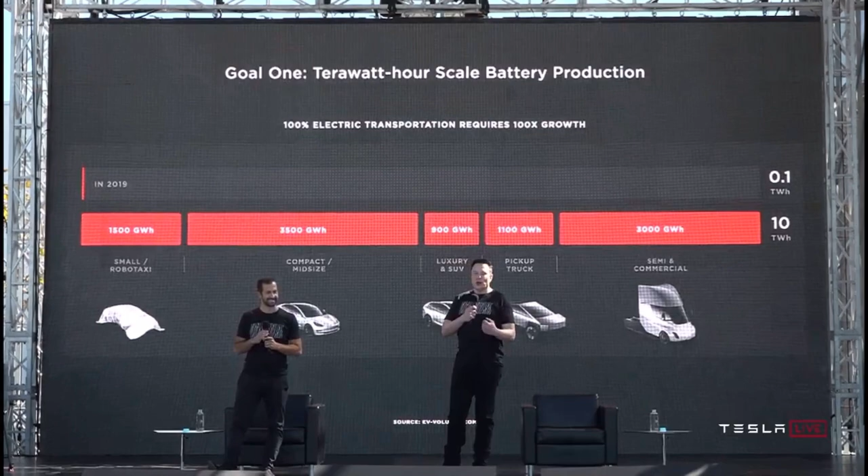So goal number one is terawatt-hour scale battery production. Tera is the new giga, and a terawatt is 1,000 times more than a gigawatt. We used to talk in terms of gigawatts; in the future, we'll be talking in terms of terawatt hours.

This is what's needed in order to transition the world to sustainability. We're talking about 100x growth in batteries for electric vehicles to achieve this mission. And we are going to get there. It's just a matter of how fast, and our intention is to accelerate it.

You basically need on the order of roughly 10 terawatt hours a year of battery production to transition the global fleet of vehicles to electric. And the average vehicle lasts 15 years, so we're talking about 150 terawatt hours, give or take, to transition all vehicles of all types to electric. So it's a lot of batteries, basically.

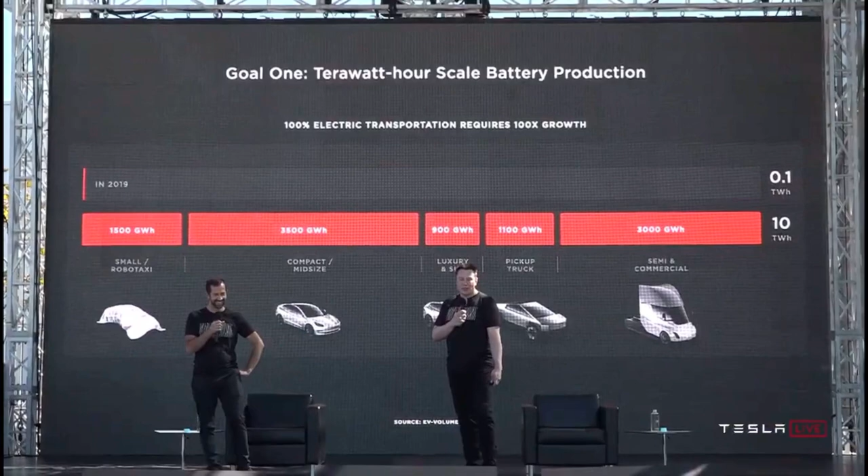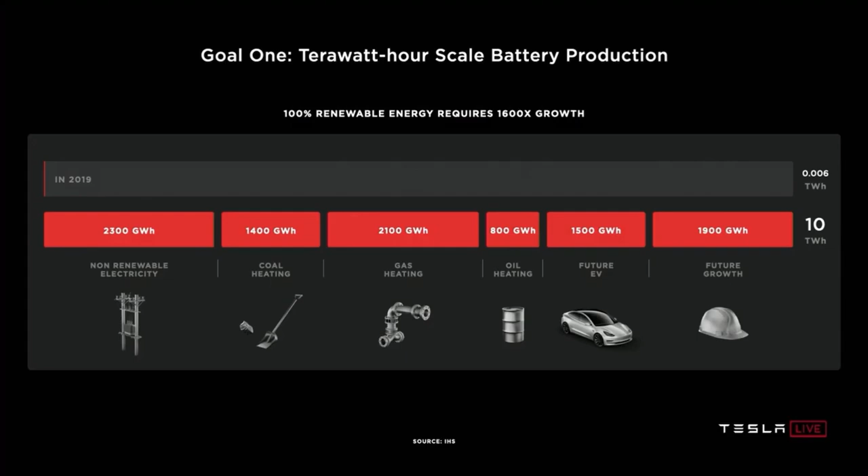And then on the grid side, we have a similar mountain to climb: 1,600 times growth from today's grid batteries to go 100% renewable on the grid and to take all of the existing heating fossil fuel uses in homes and businesses 100% electric.

This number, I think, might grow even more, as the world economy matures and as countries with high populations industrialize, we could see this number be even more. But let's say it's roughly 20 to 25 terawatt hours per year, sustained for 15 to 25 years, to transition the world to renewable. This is a lot.

So today's batteries cannot scale fast enough. They're just too small. For Giga Nevada, 150 gigawatt hours per year is probably what we expect to make out of there, but this is really pretty small in the grand scheme of things. That's only 0.15 terawatt hours.

And they cost too much. So we would need 135 fully built out Nevada gigafactories to achieve 20 terawatt hours a year. It's not scalable enough of a solution.

We need a dramatic rethink of the cell manufacturing system to scale as fast as we can and should.

And I think we should view this as more than just a question of money. Money is sort of like an ethereal thing, but it's really the amount of effort. You have a certain amount of effort, in terms of people and machines, and depending on how efficient that effort is, for a given amount of effort, you want the most amount of batteries.

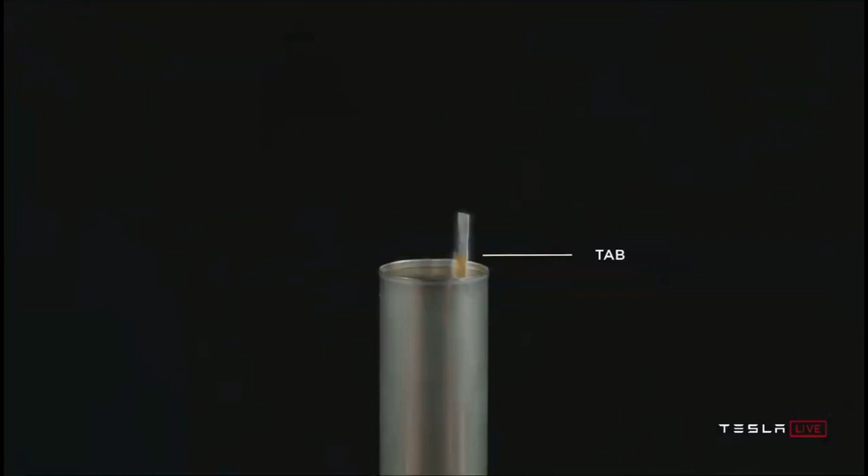So first, before we get too far into it, let's talk about what is in a battery cell. We've got the cap and the can, negative and positive terminals of the cell. When you open that cell, you've got a tab connected to those terminals, what we call the jelly roll, which is the wound electrodes on the inside.

You can actually see what this looks like as you unwind it. This is over 1 meter long in a typical 2170 cell. So it's quite a long winding process. And you can see the tab still there.

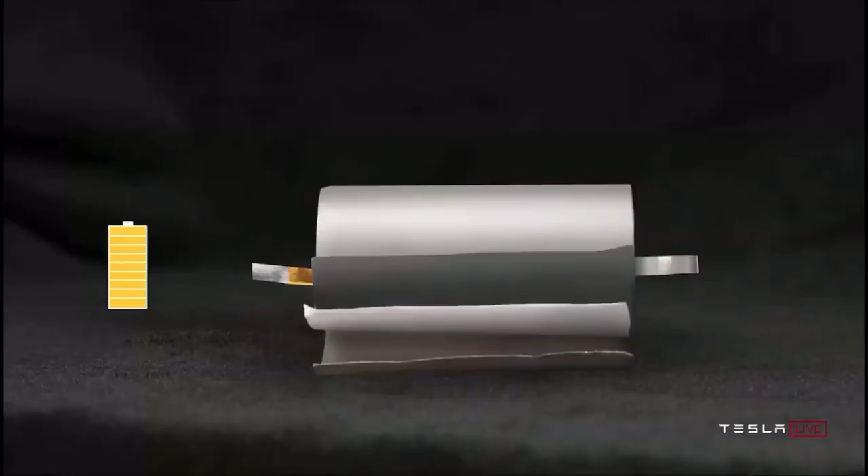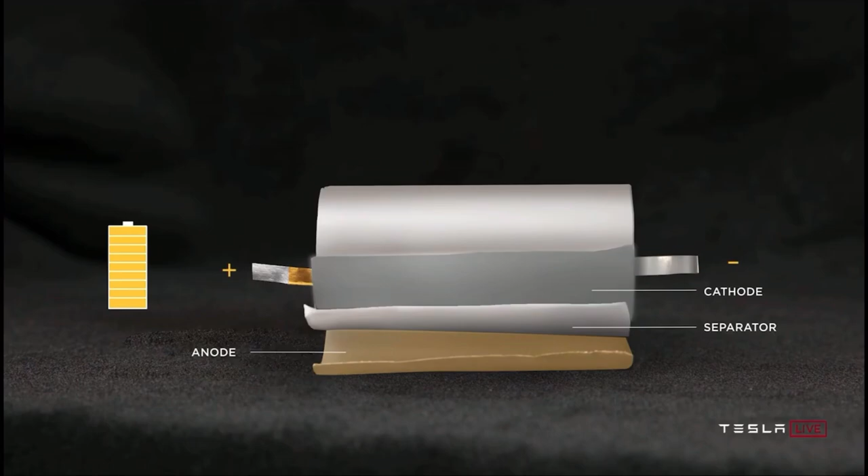To explain what's actually going on here, we've identified anode, cathode, separator, positive and negative terminal. Watch what happens as we discharge the cell. Got lithium moving from anode to cathode, and then the reverse. When we charge the cell, lithium moving from cathode to anode across the separator.

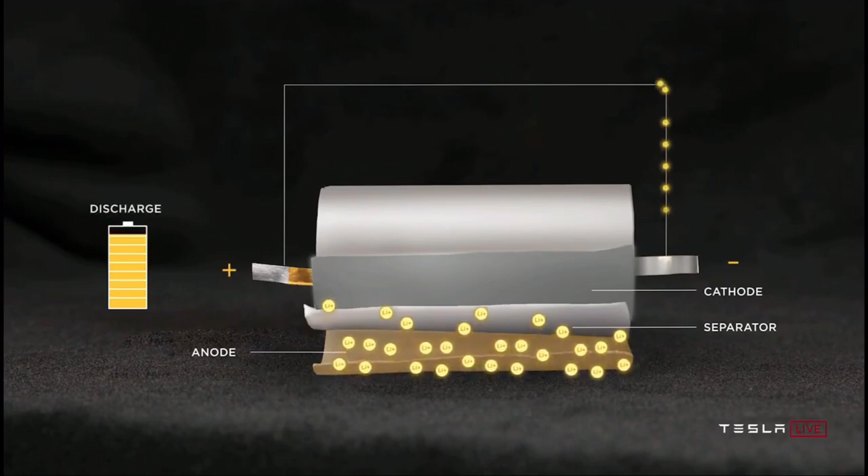This is the basic of what makes all lithium-ion batteries, no matter what the form factor is.

And when we look at what's happened to date, at least in our products, we've moved from the 18650 form factor to the 2170 form factor through great collaboration with our partners, Panasonic, new partners like LG and CATL, and probably others in the future.

Actually, a slight note on why it's called the 18650, although not on the slide, versus the 2170: the first two digits refer to the diameter, and the second two digits refer to the length. So that helps explain why these are weird numbers. But nobody could explain to me why there was an extra zero.

So I said, okay, well we're deleting the zero that nobody can explain in future form factors. So technically it's like the 21700, but going forward it's the 2170 because we just got rid of the extra zero since it's pointless.

And this was an evolutionary step, going from 1865 to 2170, bringing 50% more energy into the cell. But when we look to the ideal cell design, if we were to do it ourselves, we need to go beyond just what's in front of us and study the full spectrum of options.

So as you can see, we swept the key figures of merit, how much we can reduce the cost, and how much vehicle range increases as we change the outer diameter of the cell. We found a sweet spot somewhere around 46 millimeters.

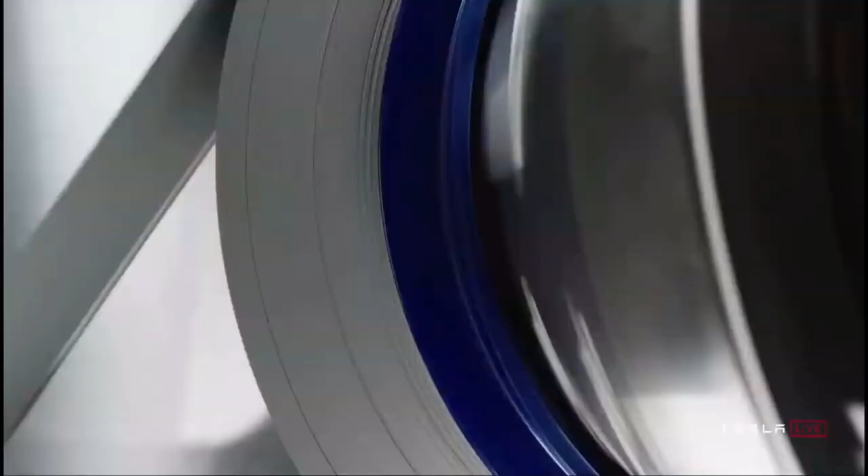It's a video of some of what's going on in the plant.

It will take about a year to reach the 10 gigawatt hour capacity. This is important to appreciate - when you build a factory, there's a certain capacity you design to, and then it takes time to actually achieve that capacity. So I'd say it's probably about a year before we get to the 10 gigawatt hour annualized rate with the pilot plant, and this is just a pilot plant. The actual production plants will be more on the order of maybe 200 gigawatt hours, maybe more over time.

But let's stack up everything we just saw at the cell level. Just the cell form factor change enables a 14% dollar per kilowatt hour reduction - just that cell form factor change. And now that you've been teased on this factory, we're going to walk step by step through that factory and discuss a series of innovations there.

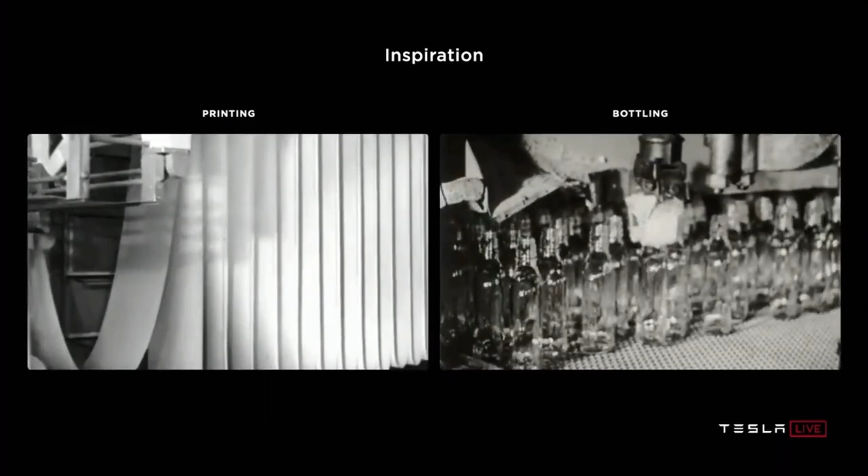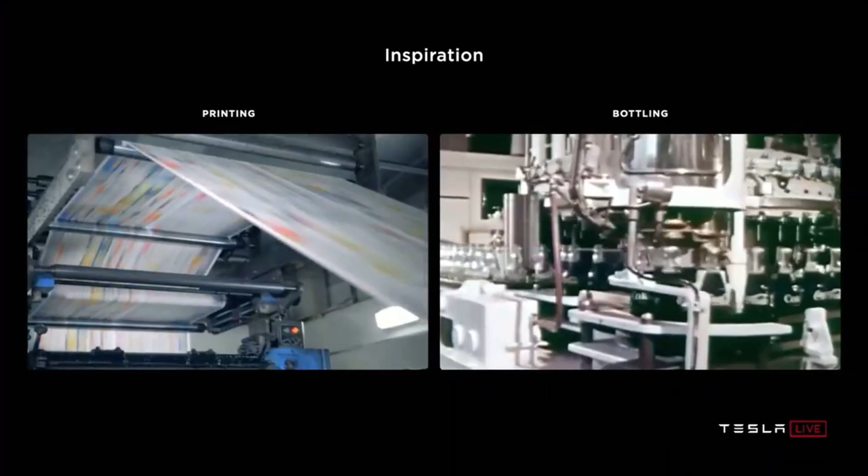When thinking about the ideal cell factory, we have inspirations behind us in the paper and bottling industry, where from humble beginnings, over a century of innovation has enabled mass scale, continuous motion, unbelievably low manufacturing cost. When we think about the lithium-ion industry, which is really only in its 3rd decade of high-volume production, it has so far to go to achieve similar scale and simplicity. That was the inspiration we set out to the team as we thought about how to marry cell design and manufacturing in the best possible factory.

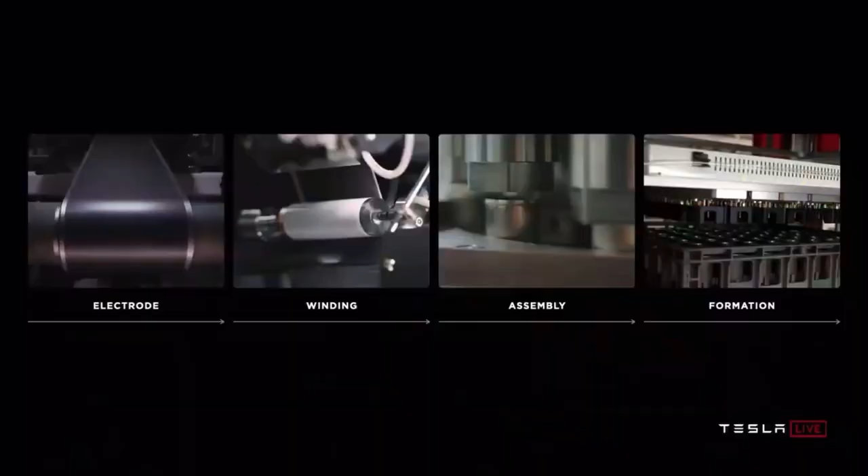Let's talk a little bit about what's in a cell factory. First, there's an electrode process where the active materials are coated into films onto foils. Then those coated foils are wound in the winding process we just talked about, where if you have tabs, you have to start and stop a lot. Then the jelly roll is assembled into the can, sealed, filled with electrolyte, and sent to formation, where the cell is charged for the first time, the electrochemistry is set, and the quality of the cell is verified. We set out at every step of this process to take that inspiration and think about how to make those processes fundamentally better and more scalable.

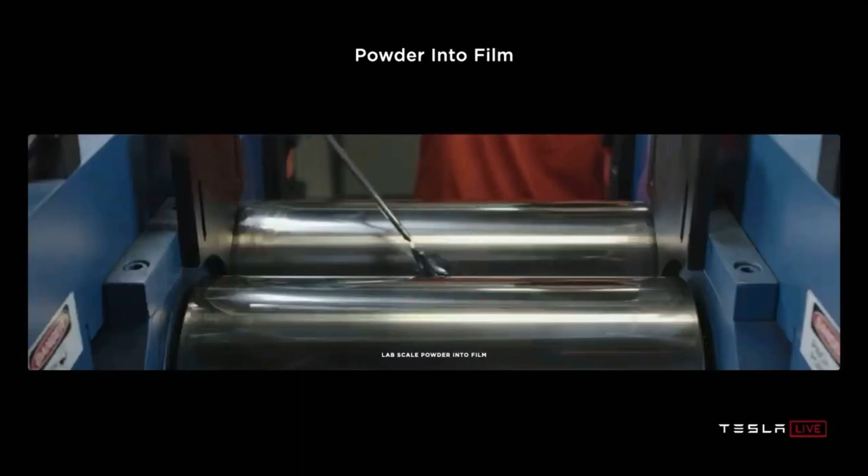It's worth noting that we acquired Maxwell a little over a year ago. It's certainly a good company, but the dry coating they had was sort of - I would call it - proof of concept. Since the acquisition, we've actually revved the machine that does dry coating 4 times.

So we're in revision 4 post acquisition of the machine, and there's still a lot of work to do. I would not say this is completely in the bag. As you go from benchtop to lab to pilot to volume production, there are major issues you encounter at every level. It's not like you make something work on your bench and bingo, now you can make a bazillion of it. It's insanely difficult to scale up.

But if you do scale it up, what you saw before becomes this. So you can see the motivation: a 10 times reduction in footprint, a 10 times reduction in energy, and a massive reduction in investment. But as Elon was saying, simple is hard.

I would like to not say that right now it's just totally working. It's close to working, but even now at the pilot plant level, it's not fully there. Well, it's fair to say it does work, but with not a high yield. We're still ironing out the kinks, but we've made tens of thousands of cells, thousands of kilometers of electrode. We're on the 4th generation of the equipment, so we've learned a lot along the way.

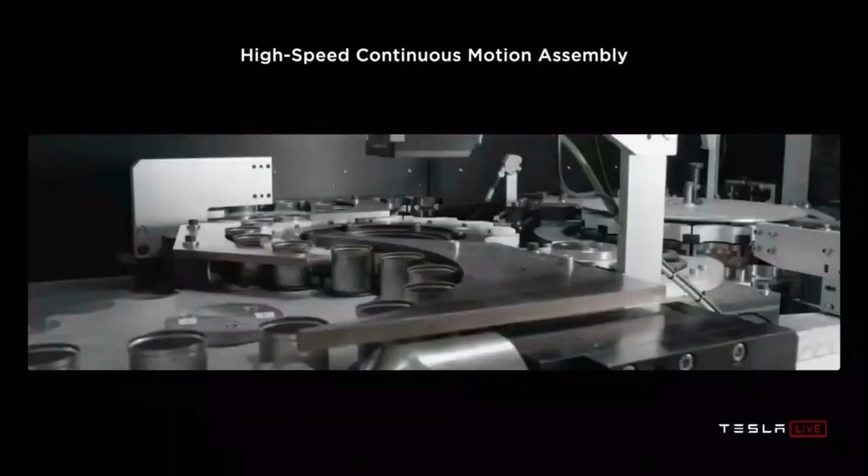So let's talk a little bit about assembly, which is next. The key to a high-performing assembly line is accomplishing processes while in continuous motion, thinking of the line as a highway: max velocity down the highway, no start and stop, no city driving, no stoplights or traffic lights. You want the highway.

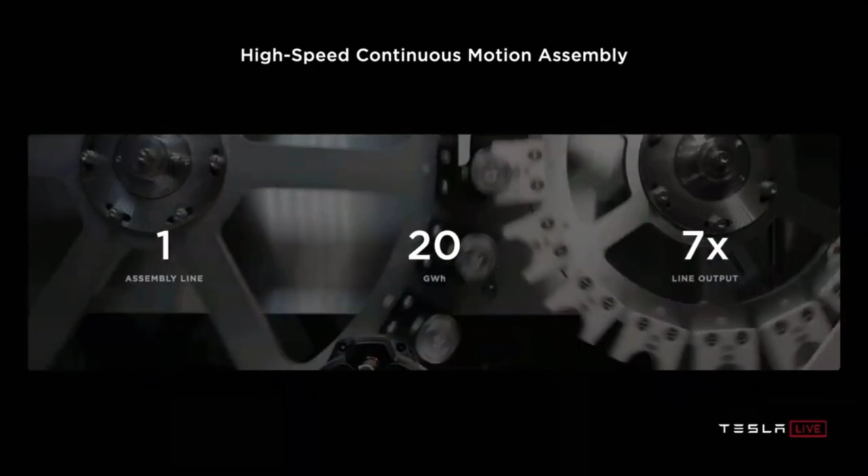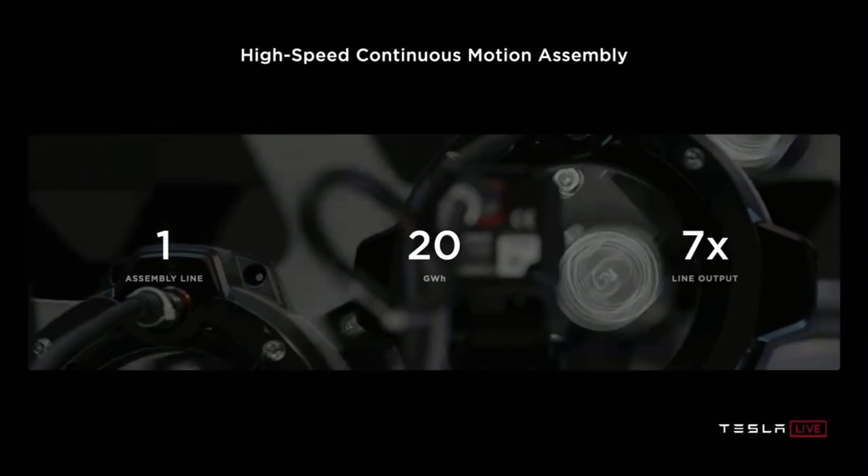Together with our internal design team that makes and designs this equipment, we coupled thinking about how to make the best cell with thinking about how to make the best equipment, so we could accomplish the fastest parts per minute rates on all of these tools. Through all of that development, we got to the point where we can implement assembly lines: one line, 20 gigawatt hours, 7 times increase in output per line. When you're thinking about scalability and pure effort, having one line be 7x the capability is just force multiplying.

You can think about the fundamental physics of a factory. It's actually quite a lot like the rocket equation, where you've got your exhaust velocity and then the log of the start to end masses. So it's basically saying how fast are things going and what percentage of the factory volume is doing useful work. Conveyance does not count as useful work, only the value-added steps.

If you break the factory down into cubic meter sections, or smaller, say 1 liter sections, and ask is a majority of this volume doing useful work, you would be astounded at how bad most factories are. They're like maybe 2 or 3%, including our factory in Fremont. I think it's possible to get to at least 10 times that volumetric efficiency, so more like 30% ish, maybe more, and be 10x better, which means the factory can be 10 times smaller.

Then the other thing is how fast things go through the factory—it's speed and density. The faster you go, a factory moving at say twice the speed of another factory is equivalent to 2 factories basically. The company that will be successful is the company that with 1 factory can accomplish what other companies take 2, 3, or 4 factories to do. So this is what we're trying to do here: with 1 factory achieve what maybe 5 or even 10 factories would normally be required to achieve.

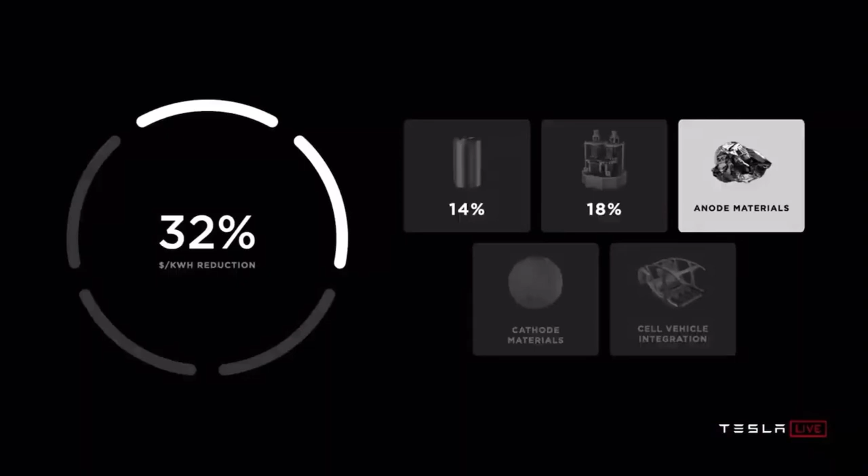And not only is all of that manufacturing innovation fantastic for enabling scale, it's also an additional 18% reduction in dollar per kilowatt hour at the battery pack level. But wait, there's more. But wait, there's more.

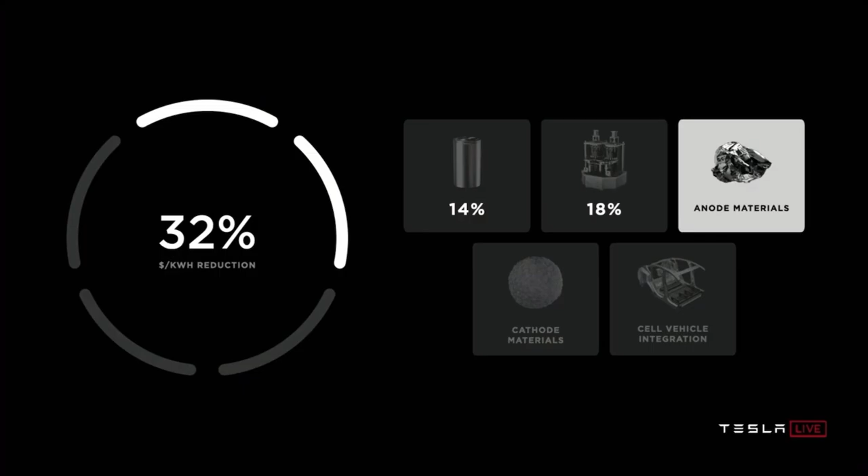So we have a manufacturing system. We've got a cell design. What are the active materials we're going to put in that cell design? Let's talk about the anode first.

Let's talk about silicon. Why is silicon awesome? It's awesome because it's the most abundant element in the Earth's crust after oxygen, which means it's everywhere. It's sand. Sand is silicon dioxide. And it happens to store 9 times more lithium than graphite, which is the typical anode material in lithium-ion batteries today. So why isn't everybody using it?

The main reason is because the challenge with silicon is that it expands 4x when fully charged with lithium. And basically, all of that expansion stress on the particles starts cracking them. They start electrically isolating. You lose capacity. The energy retention of the battery starts to fade. And it also gums up with a passivation layer that has to keep reforming as the particles expand.

Yeah, basically, with silicon, the cookie crumbles and gets gooey. That's basically what happens. Good analogy.

Current approaches to solve this, which exist—we have silicon in the cars you're all in right now—involve highly engineered, expensive materials in the scheme of things. They're still great and enable some of the benefits of silicon, but they don't enable all of it, and they're not scalable enough. You can see some of the things you've maybe heard of, SiO, silicon with carbon, or silicon nanowires. That's kind of the space right now.

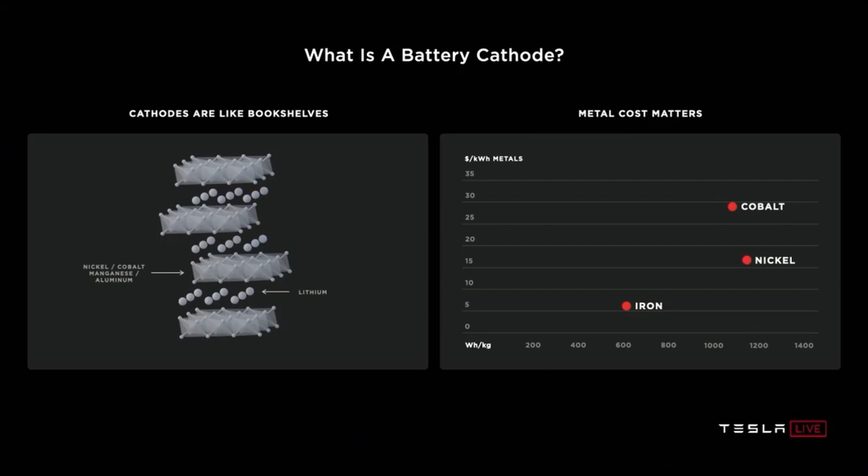Let's talk about cathodes. What is a battery cathode? Cathodes are like bookshelves where the metal—nickel, cobalt, manganese, or aluminum—is like the shelf, and the lithium is the book. What sets apart these different metals is how many books of lithium they can fit on the shelves and how sturdy the shelves are.

Cobalt is... it's tough to exactly figure out the right analogy to explain cathode and anode, but a bookshelf is probably a pretty good one, in the sense that you need a stable structure to contain the ions. You want a structure that doesn't crumble or get gooey, that holds its shape in both the cathode and the anode. As you're moving these ions back and forth, it needs to retain its structure. If it doesn't, you lose cycle life, and your battery capacity drops very quickly.

But one of the reasons cobalt is even used at all is because it's a very stable bookshelf, and the challenge with going to pure nickel is stabilizing that bookshelf with only nickel. That's what we've been working on with our high nickel cathode development, which has zero cobalt in it. Leveraging novel coatings and dopants, we can get a 15% reduction in cathode dollar per kilowatt hour. It's a big deal.

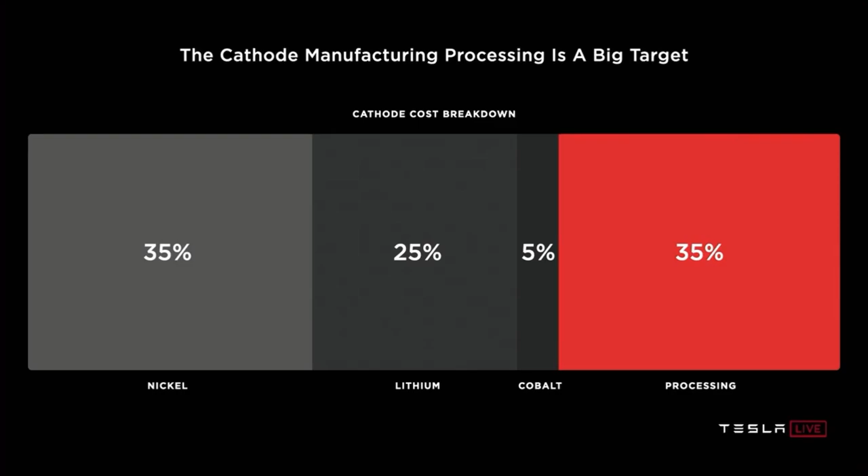Beyond the metals, because a lot of people spend time talking about the metals, actually the cathode process itself is a big target. 35% of the cathode dollar per kilowatt hour is just in transferring it into its final form. So we see that as a big target, and we decided to take that on.

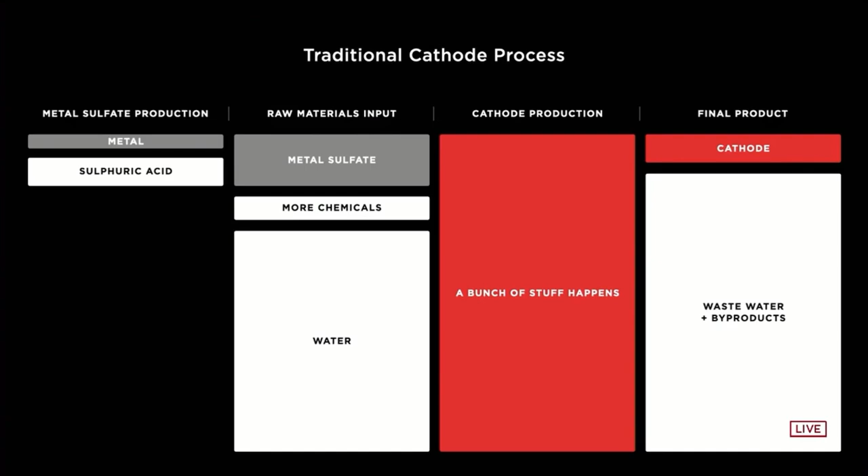Here's a view of the traditional cathode process. Effectively, if you start at the left and you have the metal from the mine, the first thing that happens is the metal is changed into an intermediate thing called a metal sulfate, because that's just what chemists wanted a long time ago. And then when you're making the cathode, you have to take this intermediate metal sulfate, add chemicals, add a whole bunch of water, a whole bunch of stuff happens in the middle, and at the end you get that little bit of cathode and a whole bunch of wastewater and byproducts.

Yeah, it's insanely complicated. If you look at the total journey of I am a nickel atom, what happens to me? It's crazy, like you're going around the world three times. There's the moral equivalent of digging the ditch, filling the ditch, and digging the ditch again. It's total madness basically, and these things just grew up as legacy things, it's like how it was done before. And then they connected the dots, but really didn't think of the whole thing from a first principles standpoint, saying how do we get from the nickel ore in the ground to the finished nickel product for a battery.

So we've looked at the entire value chain and said, how can we make this as simple as possible? And that's what we're proposing here with our process. As you can see, a whole lot less is going on here. We get rid of the intermediate metal, water, final product cathode, recirculate the water, no wastewater at all. And when you summarize all of that, it's a 66% reduction in CapEx investment, a 76% reduction in process cost, and zero wastewater. Much more scalable solution.

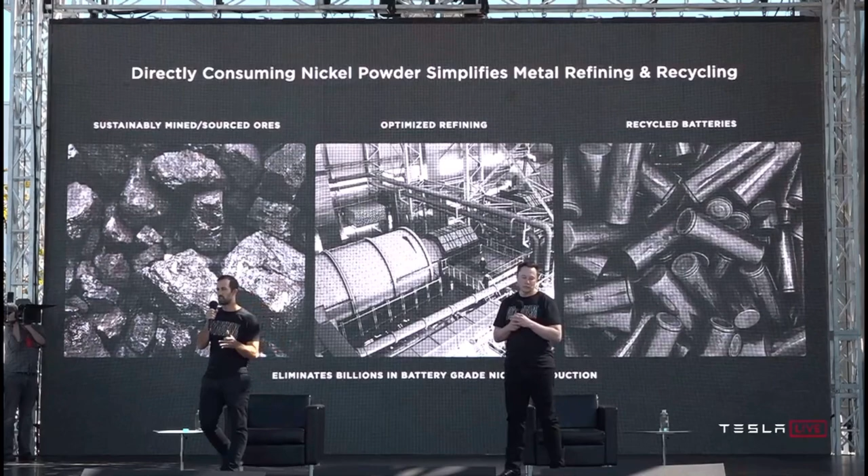And then when you think about the fact that now we're actually just directly consuming the raw metal nickel powder, it dramatically simplifies the metal refining part of the whole process. So we can eliminate billions in battery-grade nickel intermediate production. It's not needed at all.

And we can also use that same process we showed on the previous page to directly consume the metal powder coming out of recycled electric vehicle and grid storage batteries. So this process enables both simpler mining and simpler recycling.

And now that we have this process, obviously we're going to go and start building our own cathode facility in North America and leveraging all of the North American resources that exist for nickel and lithium. And just doing that, just localizing our cathode supply chain and production, we can reduce miles traveled by all the materials that end up in the cathode by 80%, which is huge for cost.

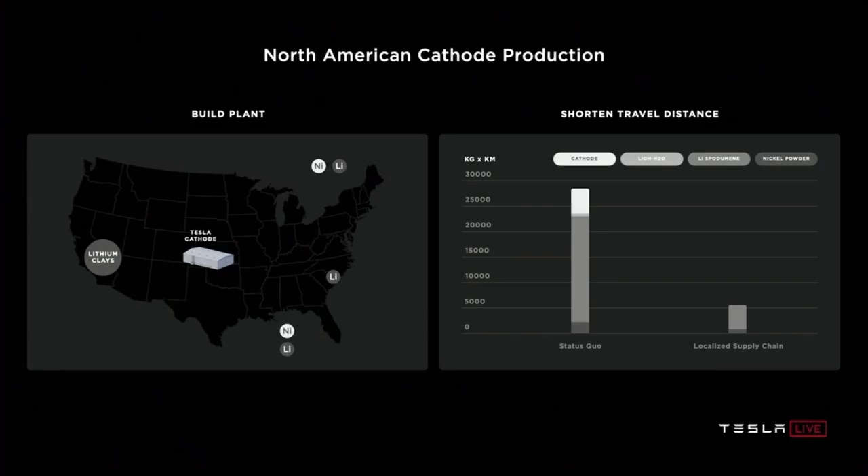Yeah, I mean, to be clear, cathode production would be part of the Tesla cell production plant. So it would just be basically raw materials coming from the mine, and from raw materials in the mine, out comes a battery. And on that note, the way the lithium ends up in the cell is through the cathode. So then we should obviously do on-site lithium conversion as well, which is what we will do using a new process that we're going to pioneer. That's a sulfate-free process again, skip the intermediate. 33% reduction in lithium cost, 100% electric facility co-located with the cathode plant.

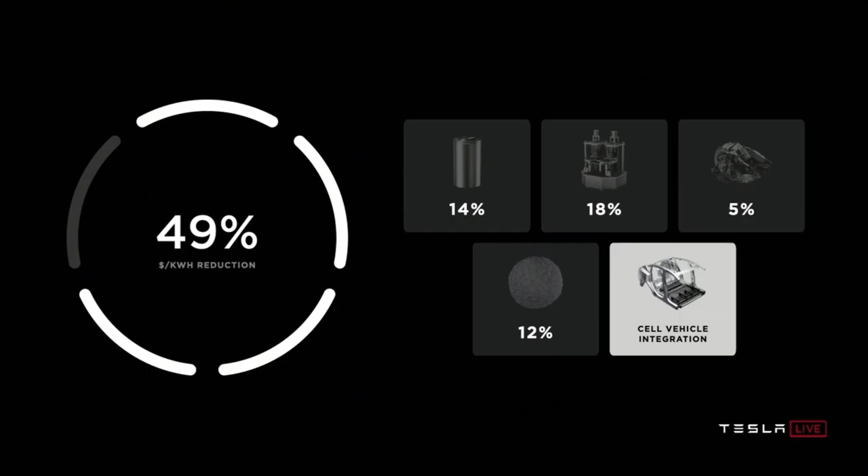There's an architecture that we've been wanting to do at Tesla for a long time, and we finally figured it out. I think it's the way that all electric cars in the future will ultimately be made. It's the right way to do things.

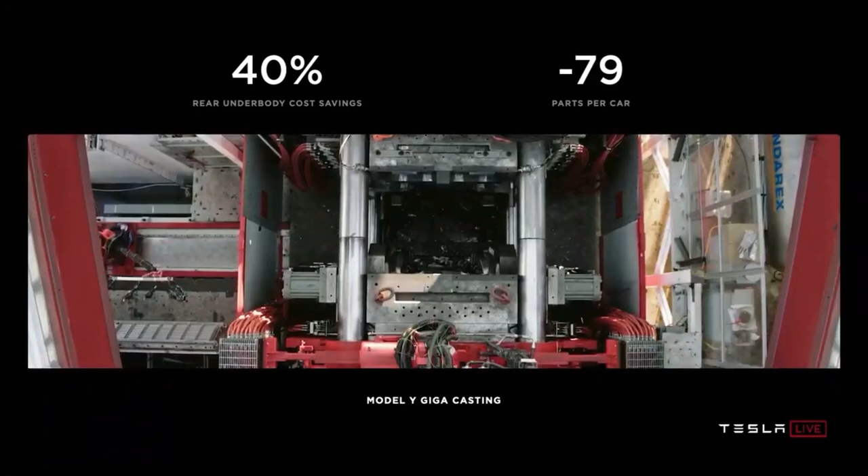So it starts with having a single piece casting for the front body and the rear body. In order to do this, we commissioned the largest casting machine that has ever been made, and it's currently working just over the road at our Fremont plant.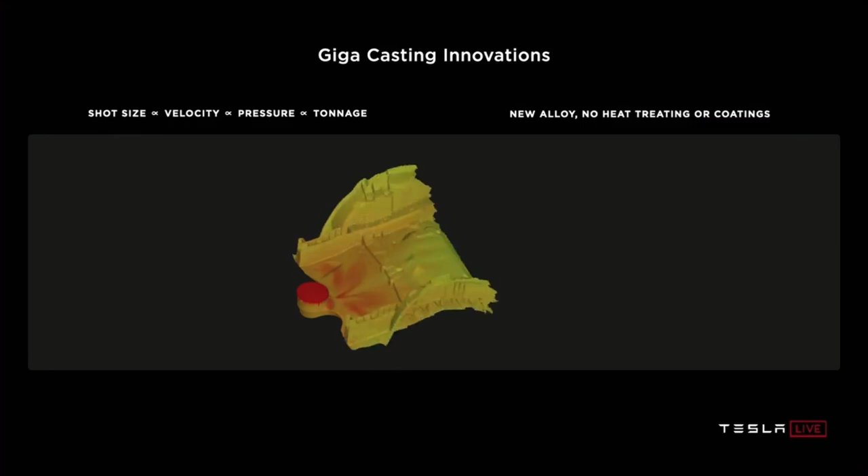We're currently making the entire rear section of the car as a single piece, high pressure die cast aluminum. In order to do this, we had to develop our own alloy because we wanted a high strength casting alloy that did not require coatings or heat treatment. This is a big deal, especially with a large casting, because if you heat treat it afterwards, it tends to deform - it does this potato chip thing - so it's very hard to keep a large casting in shape. No alloy that existed could do this, so we developed our own special alloy of aluminum that has high strength without heat treat and is very castable. That's a great achievement of our materials team.

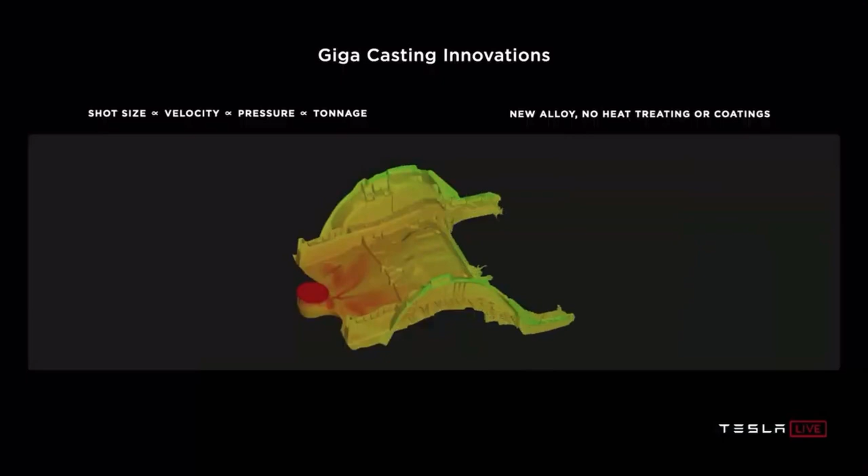In general, we've got a lot of advanced materials coming for Tesla, new alloys and materials that have never existed before. So you're basically making the front and rear of the car as a single piece, and that interfaces to what we call the structural battery, where the battery for the first time will have dual use - both as an energy device and as structure.

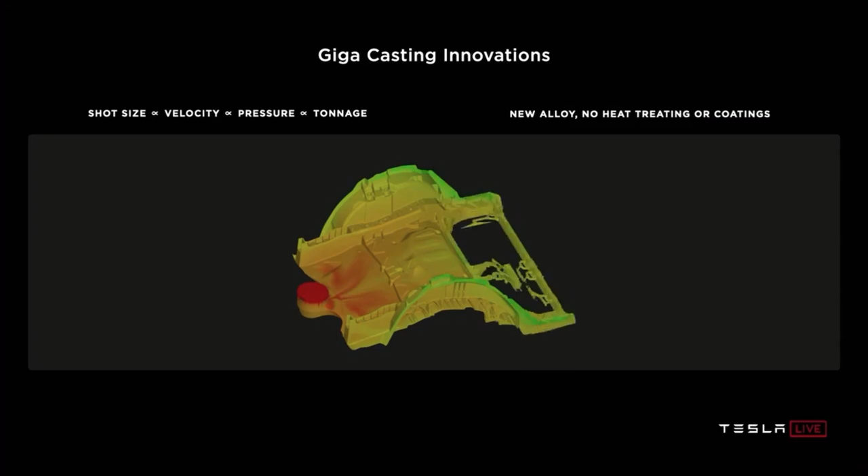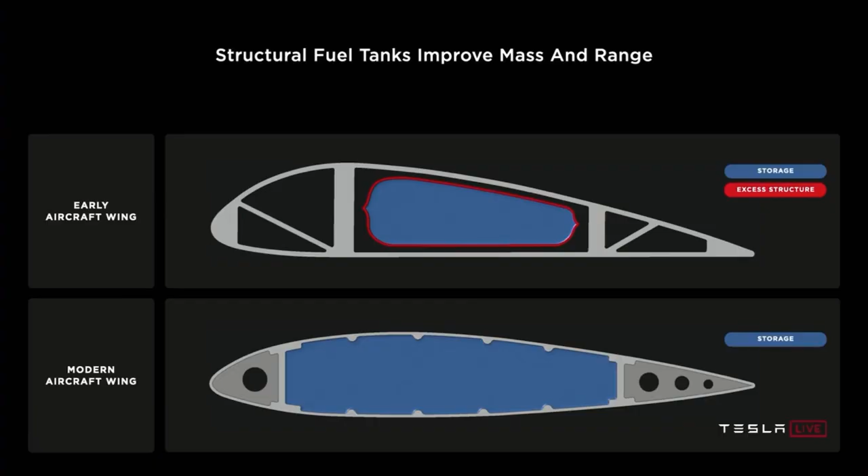This is absolutely the way things are done. In the early days of aircraft, they would carry the fuel tanks as cargo, and the fuel tanks were quite difficult to carry - basically worse than cargo. You had to bolt them down, it was very difficult. Then somebody said, 'What if we just make the wing tanks - what if we make the fuel tank in wing shape?' So all modern airplanes, the wing is just a fuel tank in wing shape. This is absolutely the way to do it, and the fuel tank serves as dual structure - it's no longer cargo, it's fundamental to the structure of the aircraft. This was a major breakthrough.

We're doing the same for cars. This is really quite profound. Effectively, the non-cell portion of the battery has negative mass. We save more mass in the rest of the vehicle than the non-cell portion of the battery weighs. So how do you really minimize the mass of a battery? Make it negative - make the non-cell portion of the battery pack negative.

It also allows us to pack the cells more densely because we do not have intermediate structure in the battery pack. Instead of having supports, stabilizers, stringers and structural elements in the battery, we now have a lot more space because the pack itself is structural.

What we do is, instead of having just a filler that is a flame retardant, which is currently what is in the 3 and Y battery packs, we have a filler that is a structural adhesive as well as flame retardant. So it effectively glues the cells to the top and bottom sheet, and this allows shear transfer between the upper and lower sheet.

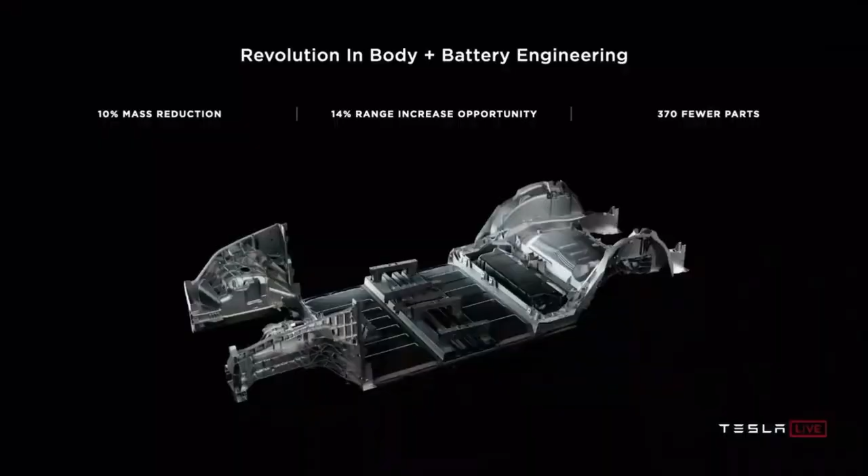So, 10% mass reduction in the body of the car, 14% range increase, 370 fewer parts.

I really think that long term, any cars that do not take this architecture will not be competitive. And it's not just a better product, but in the factory it's a massive simplification - you saw the part removal, the casting machines, the structural battery pack. We're looking at over 50% reduction in investment per gigawatt hour, 35% reduction in floor space, and we'll continue to improve that as we make the vehicle factory of the future. It's major improvements on all fronts, from the cell all the way to the vehicle.

In addition to enabling additional range and improving structural performance of the vehicle, it's worth another 7% dollar per kilowatt hour reduction at the battery pack level, bringing our total reduction now to 56% dollars per kilowatt hour.

So stacking it up, we're not just talking about cost or range - we've got to look at all the facets. Range increase: we're unlocking up to 54% increase in range for our vehicles and energy density for our energy products. 56% reduction in dollars per kilowatt hour at the battery pack level, and a 69% reduction in investment per gigawatt hour, which is the true enabler when we talk about how we achieve this scale problem.